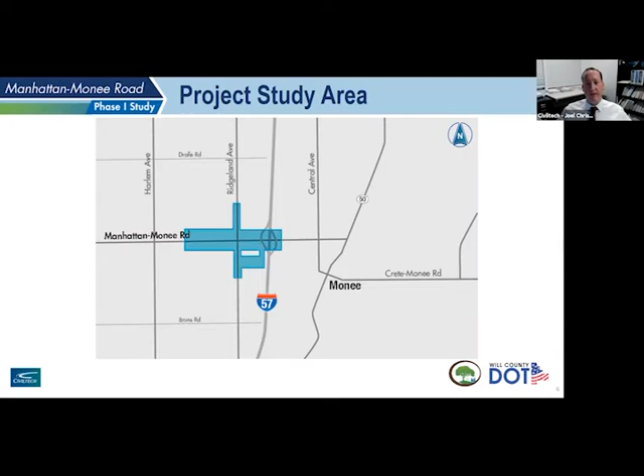So this area has seen an increase in traffic due to an influx of development. That's obviously very true of many areas in Will County, and this is especially true along this corridor. So before we present the data that we collected and the analyses that we performed, it's important to know what improvements have occurred and what future improvements are planned in the study area. The first improvement that we wanted to highlight was the I-57 interchange and Manhattan-Monee Road. The structure over I-57 was reconstructed in 2009, and it was widened to a 5-lane cross section at the interchange. However, even though the bridge is wide enough for 5 lanes, the westbound through lane is striped as only 1 lane.

The Manhattan-Monee Road improvement: Manhattan-Monee Road was widened in 2017 to continue the 18-foot median west. A traffic signal at that time was added at Ridgeland Avenue and the Amazon entrance just west of Ridgeland Avenue as well. And then the final project we wanted to highlight was Ridgeland Avenue north of Manhattan-Monee Road. That was widened to a 3-lane cross section because of some development to the north.

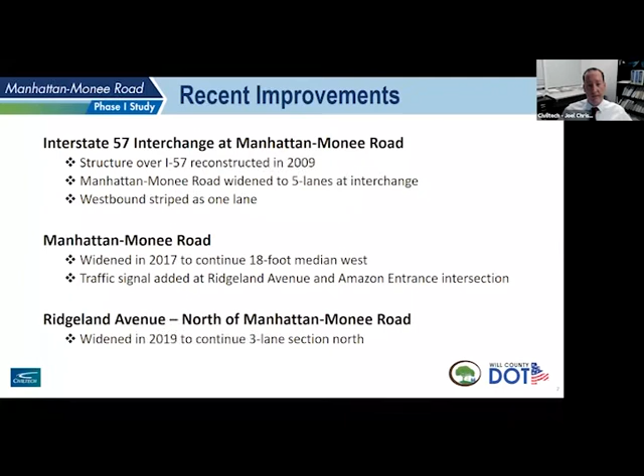Some future projects in the area, obviously one of them is our project, our phase 1 study. There's also a phase 1 study being completed by the county that's just to the west of us. It's from Center Road to basically the Village of Monee western limit. And then there's some corridor improvements identified in the Will Connects 2040 plan that are farther out, but something that we will consider as we move forward with this study. The village is currently in design engineering and right-of-way acquisition negotiations to realign Cleveland Avenue to intersect Manhattan-Monee Road at Hamilton Avenue. So that's something we'll keep in mind as we move forward as well.

So we'll kind of walk through the project length, discuss some of the existing conditions that are throughout the corridor. To orient everyone, north is up on this exhibit. So Manhattan-Monee Road is a minor arterial. It's under the maintenance and jurisdiction of Will County. The existing lane configuration consists of one 12-foot through lane in each direction with an 18-foot median.

At the I-57 interchange, which is at the right side of this exhibit, the roadway widens to provide 2 through lanes in the eastbound direction. However, as I mentioned earlier, the westbound outside through lane is striped to provide only 1 lane at this time. Traffic signals are located at the east Amazon entrance towards the left side of your screen, also at Ridgeland Avenue, and then at the I-57 ramps at the interchange.

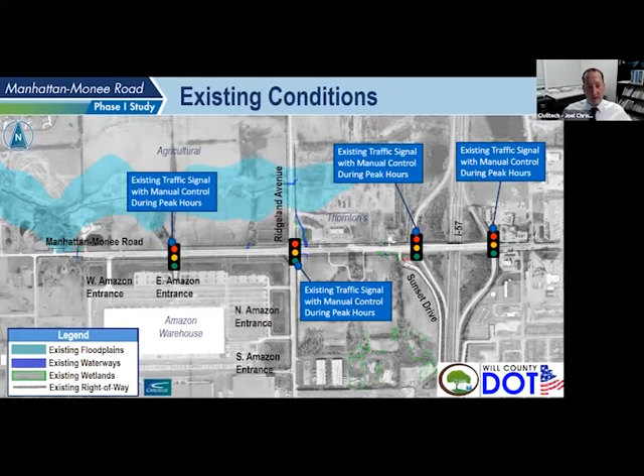Excellent, thank you. So crashes. One of the ways we determine the existing safety in the corridor is to perform a crash analysis. We request crash data from various sources and map out the type, location, time of day, pavement condition, as well as the severity of the crash. From that analysis, we can determine if there are any predominant crash types or patterns, and also determine how we can improve safety in the corridor. So this is one of our first steps that we do as part of each project.

From this exhibit, you can see that the predominant crash type, which is in yellow, are rear ends, and those make up just over 60% of the crashes. This type of collision typically occurs when there's congestion within the study area. So now I'll turn it over to Jim Tibble, who will discuss the traffic and some of our area observations.

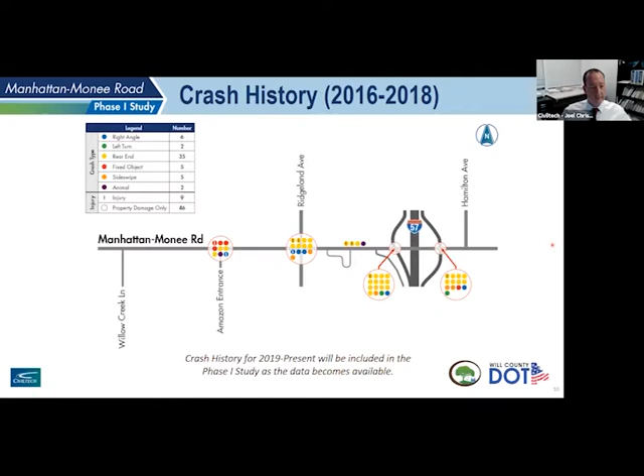So back in December of 2019, prior to the pandemic, we took some traffic counts out in the project area to understand the amount of traffic that's out driving Manhattan-Monee Road and the intersections. During those counts, we observed manual traffic control at all 4 of the signalized intersections. And this was happening during both the AM and PM peak hours.

The average daily traffic along Manhattan-Monee Road increases as you approach I-57. At the west end, Manhattan-Monee Road sees about 8,300 vehicles per day. And as you approach I-57, it increases. And just east of the northbound ramps, the ADT, average daily traffic, is just below 20,000 vehicles per day. The south leg of Ridgeland sees 6,400 vehicles per day, and the north leg 1,500.

Along I-57, the ramps to and from the north see just over 8,000 vehicles a day, and to and from the south, just under 2,000 vehicles per day. When we look at designing a roadway improvement, we want to look at the existing traffic, but also at the future projections to evaluate how the corridor will function with the future traffic growth.

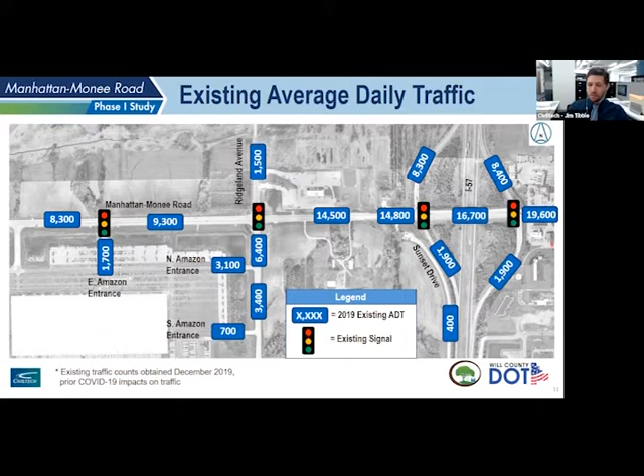In the year 2050, the traffic is projected to almost double within the corridor. Manhattan-Monee Road will range from about 15,000 vehicles per day at the west end up to just below 30,000 vehicles east of the interchange. Ridgeland Avenue on the south leg increases to 11,400 vehicles per day, and the ramps to and from the north see an average daily traffic grow to 12,800 vehicles per day. After we get the anticipated traffic growth, we analyze how much delay we experience at the intersections and along the corridor.

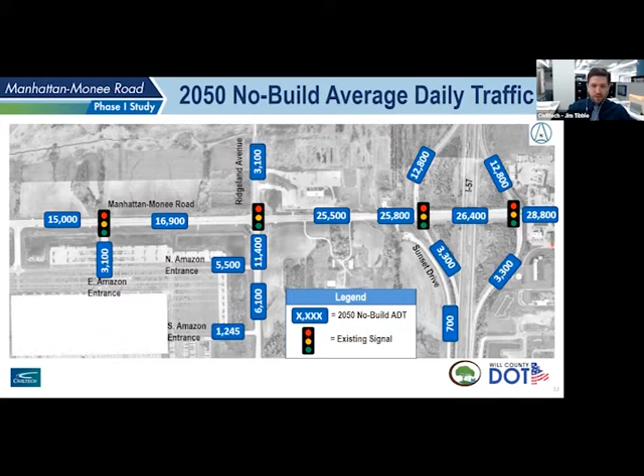Traffic operation and delays are analyzed on a scale very similar to a report card, where you have A being the best or free flow traffic and F being the worst or gridlock. A level of service D or better is typically considered an acceptable level of service.

Under the existing conditions, the intersections with traffic signals at both Ridgeland and the Amazon entrance operate with a level of service C. At the interchange, the intersections operate with levels of service E and F. I do want to note that at the Amazon entrance and Ridgeland, there are individual movements that operate at levels of service E and F. However, the entire intersection as a whole operates as a level of service C.

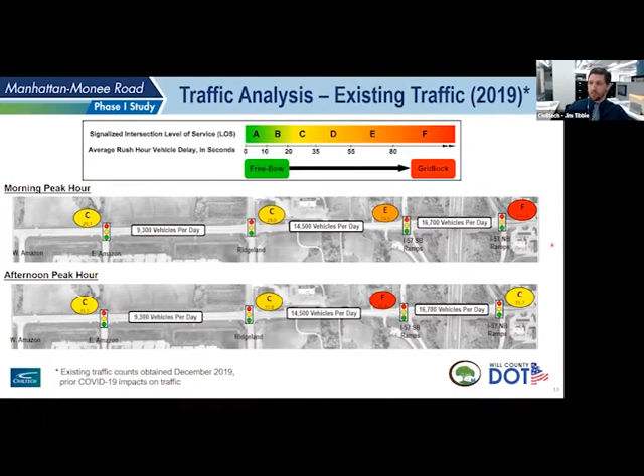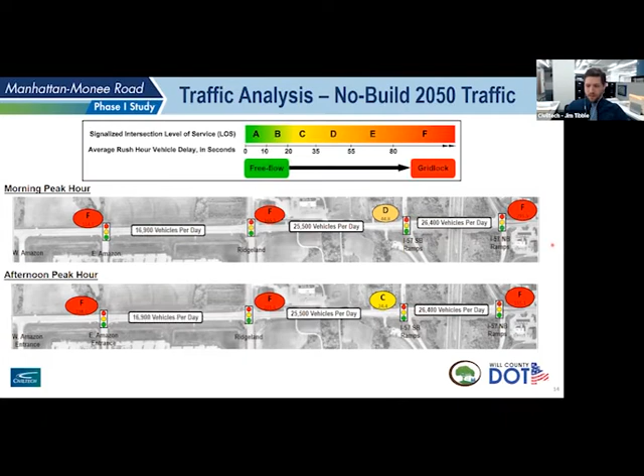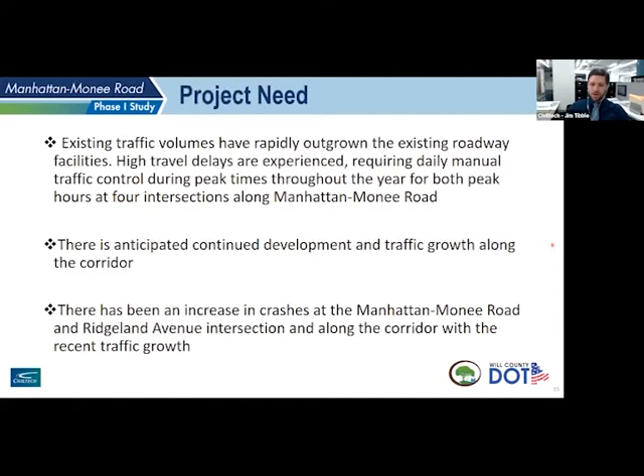So what does that mean for our project? The existing traffic volumes have outgrown the existing roadway facilities. High travel delays are experienced, requiring manual traffic control during the peak hours. There is continued growth and development within the corridor, and there has been an increase in crashes as traffic has grown.

So with this project, we will look to improve the safety and operation of Manhattan-Monee Road at the Ridgeland Avenue intersection. We will also improve the safety and operation of the corridor as identified in Will Connects, the Will County 2040 plan, in conjunction with other adjacent county and village projects.

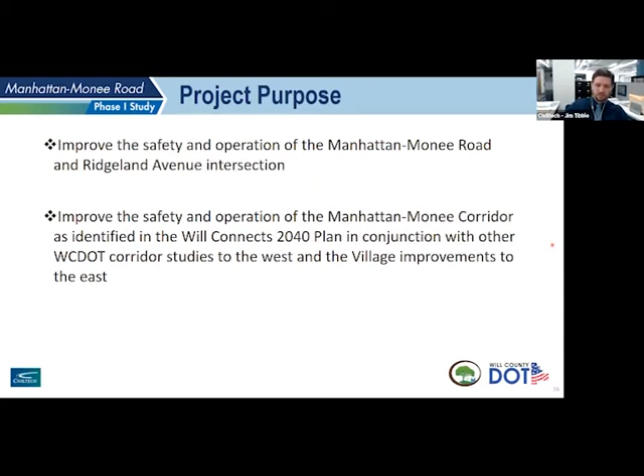So what are some things we consider when we look at the corridor and begin our alternative analysis? There are different segments along the corridor, as Joel has mentioned, that have different right-of-way widths. At the west end, it was narrower. As you head towards I-57, it gets wider. And this could have different impacts as we look at alternatives and we widen the roadway symmetrically on both sides, or if we widen to one side.

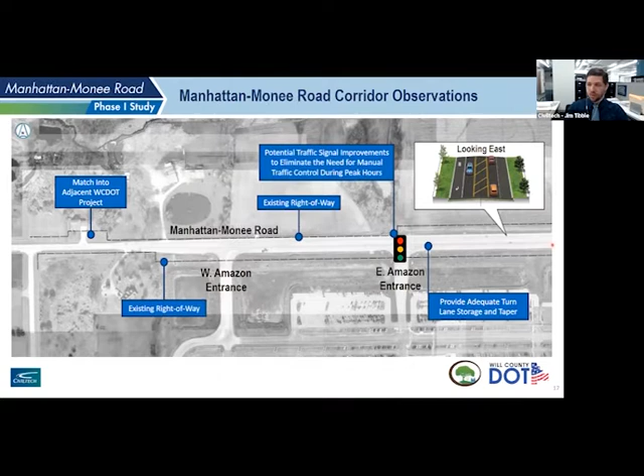We also want to make sure that the traffic signals all operate acceptably and have adequate storage lanes and taper rates for the 2050 traffic. We want to eliminate the need for manual traffic control. We will also look at the potential drainage improvements, including curb and gutter and possible stormwater detention, as well as adding corridor lighting. We want to provide the right number of travel lanes required to reduce corridor delay. We will evaluate impacts to the environmental resources, adjacent properties, and utilities as well.

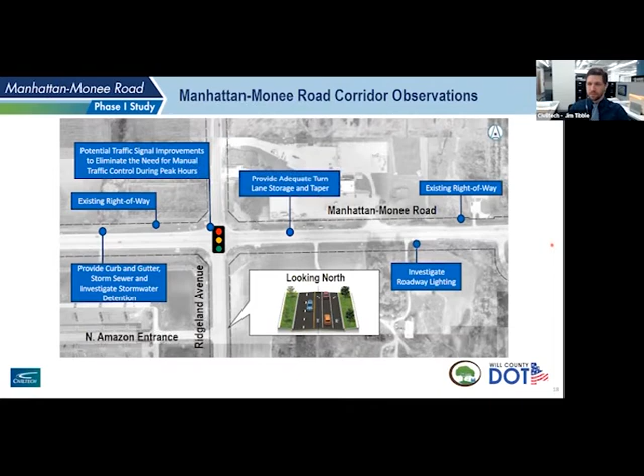As we approach the I-57 interchange, there are a few other items that we will be looking at. There is a heavy directional movement at this interchange, the southbound to westbound movement, as well as the eastbound to northbound movement. Further coordination with the Illinois Department of Transportation will occur to determine the extent of the project at this interchange. I also want to point out that the intersection of Sunset Drive is located very closely to the southbound exit ramps to that intersection. This is a potential safety issue that we will look to address.

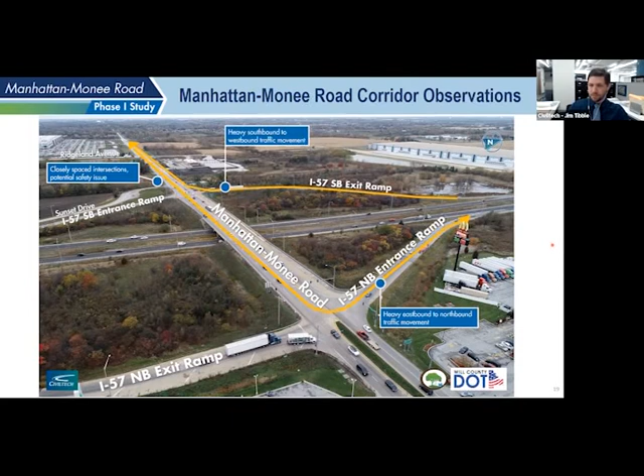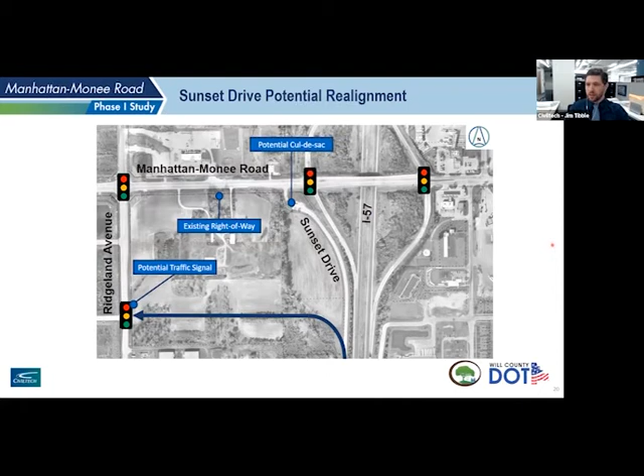To address this issue of the closely spaced intersections, we will investigate a realignment of Sunset Drive. The realigned roadway would direct traffic to Manhattan-Monee Road through Ridgeland Avenue. With the realignment, the new intersection of Sunset Drive and Ridgeland Avenue could be controlled by a traffic signal. The existing Sunset Drive could be modified to have a cul-de-sac at the north end, still maintaining access for all property owners.

So what are our next steps? We are following the federal aid process to make sure this project is eligible for federal funding. To do that, we need to evaluate our alternatives from both a geometric design standpoint as well as an environmental standpoint. Through the alternative analysis, a range of alternatives will be developed that meet the project purpose and need.

The environmental process will evaluate environmental impacts to the corridor for each alternative. And those impacts include impacts to wetlands and other biological resources, such as endangered species, noise analyses, and special waste. After the analyses are complete, a preferred alternative will be selected. During this whole process, we will be coordinating with many agencies, including the Illinois Department of Transportation, Federal Highway Administration, and the Chicago Metropolitan Agency for Planning.

We are currently in phase 1, which is the environmental and design studies. We are anticipating our phase 1 study to be completed in about a year or so. Later this year, or maybe early next year, we anticipate a second public information meeting to present the preferred alternative. After that, the next step is phase 2, which develops contract plans and covers the right-of-way acquisition and negotiations.